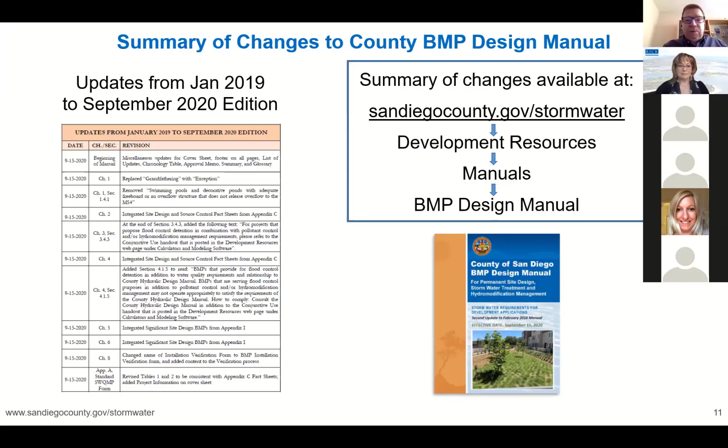So the updates are structured right now from the last update that we made in January 2019 all the way to September 2020, which is the current edition. Next. A little bit of context here for history. Originally from the 2013 municipal stormwater permit, all the co-permittees, which were all the incorporated cities in Region 9, which is 18 cities, plus the San Diego Regional Airport Authority and the Port of San Diego, including the County of San Diego for the unincorporated areas.

All of us gathered together and put together the model BMP Design Manual, which is the one on the far right. So also every jurisdiction put together its own BMP Design Manual to incorporate local specifics. In May 2018, the model BMP Design Manual was updated, and therefore most of the jurisdictions, not all of them, decided to update their own BMP Design Manual too, which the county did and released it in January 2019. So we went from a February 2016 all the way to January 2019 version, and we published a summary of changes. And then we go to the left, which is where we are right now.

We updated the County BMP Design Manual effective September 2020. And the summary of changes on the far left is what gives you the edits that were made from the January 2019 version all the way to the September 2020 version. Just for additional background, the model BMP Design Manual was updated and published in May of 2020, which is this year, just to incorporate some editorial edits. Even though I'm not showing the screen for the model BMP Design Manual, there was a minor update.

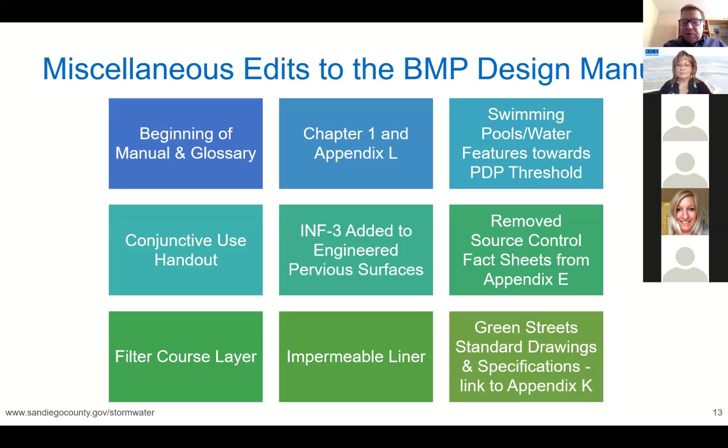Then we removed source control fact sheets from Appendix E, added filter course layer info, added impermeable liner info, and then made a connection of the Green Street standard drawings and specs into Appendix K. Next. So let's start at the beginning of the manual. So as you know, we have a new cover with a new photo, and we also changed the effective date, which is September 15th, 2020, which is this year.

Also, like I've shown before, we updated the summary of changes. We also updated the internal memo, which gives the green light to go ahead and publish the County BMP Design Manual. We also added a paragraph to the summary, which includes the chronology, which lists that this is the latest update to the BMP Design Manual. And then lastly, at the end of the manual, we updated the glossary to edit some terminology.

Next. All right, so we're in Chapter 1 and Appendix L. The only change is one global change, and it's replacing the term grandfathering with the term exception.

And, just to be more sensitive to today's times, if you Google grandfathering, you'll see there's some connotations in there. So we don't want to be part of that. So in our written guidance, we went ahead and updated that. It's just a minor update. It's just editorial, but just wanted everybody to know that that was done.

Next. In Chapter 1, in Section 141, we removed language which is shown struck through at the bottom, which is swimming pools and decorative ponds. The reason for that is this is one of the exclusions listed in the manual for areas that can be excluded from impervious area calculations towards determining if the project is a priority development project or PDP. So the one that remains is anything that's listed in Table 1-2, all of the areas that can be considered exempt from the stormwater requirements, such as routine maintenance, resurfacing, etc. So you don't count those as impervious surface.

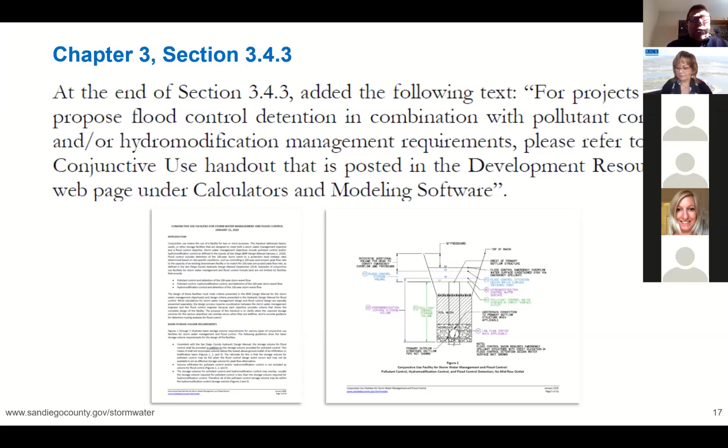Next. This is table B.1-1, which is the runoff factors. We do have permeable pavement listed under engineered pervious surfaces, but it's listed as a site design BMP permeable pavement, and we didn't have the structural BMP permeable pavement listed in there, so we just decided to add it. It doesn't change anything other than clarify that if you have that type of permeable pavement, it is also under that category of engineered pervious surfaces. Next.

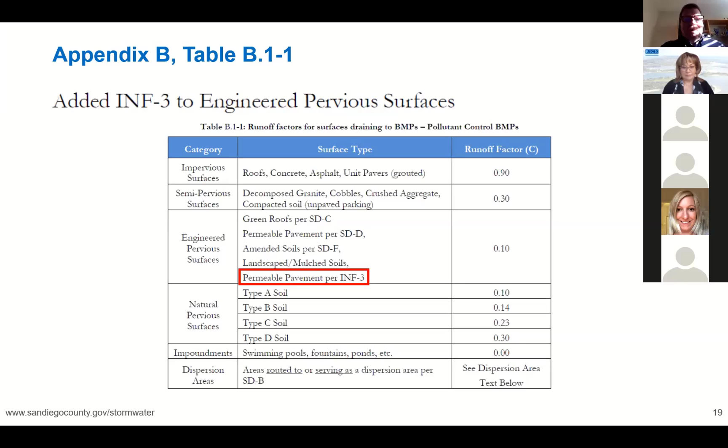We removed all the source control fact sheets from Appendix E, because that's the big change: now we have all the source control fact sheets in the new Appendix C. We updated the table. I'm going to talk about this table later in the presentation as to how it's currently labeled, but it's basically removing those types of source control BMPs from Appendix E.

Next. In Appendix E, we have three types of BMPs: BF-1, which is biofiltration, PR-1, which is biofiltration with partial retention, and INF-2, which is bioretention. We didn't have much information on the filter course, so we decided to add this language, which clarifies and gives you context: minimum 6 inches thick, provided in two separate 3-inch layers. Top layer shall be made of ASTM C33 choker sand, and the bottom layer shall be ASTM No. 8 aggregate. So just additional language to clarify.

Next. In Appendix E, this is the biofiltration BMP. We realized that we had the exact same figure for the three BMPs that I mentioned before, and when we have exactly the same figure, it ends up being confusing.

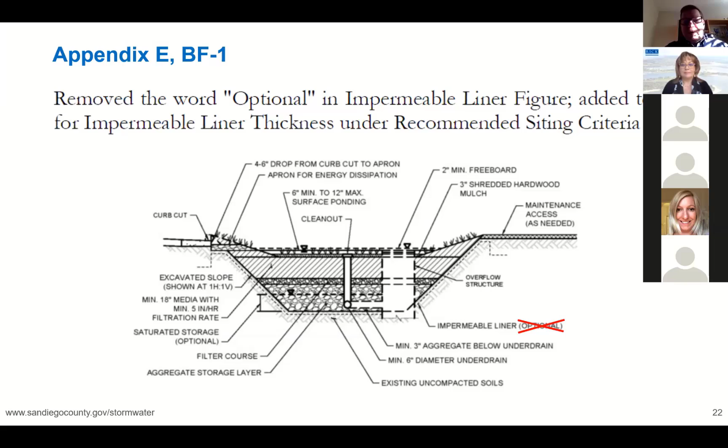So the biofiltration is supposed to have an impermeable liner, so it's not optional. We removed the word optional from that figure. That's the only change we made.

Next, Appendix E will also have the biofiltration BMP. There were some questions asked about the thickness of the impermeable liner. We already had that information, we just didn't make the link. It shall be 30 mil per County Design Standard Drawing GS 3.00 and County Green Street Supplement to Caltrans Specs 20-11.08B. So the information was already there since we published our Green Street Standard Drawings and Specs, or we made the update about a year ago.

30 mil is about the thickness of a credit card, just for reference. So again, we didn't have this, and now we have additional information on the thickness of the impermeable liner.

Next, we wanted to make a link to the county update to the design standard drawings for Green Streets, and also the specs, the specification for Caltrans and Green Book that refer to the Green Streets. So we just updated the information so you can find it easily. It's under the Development Resources website under Green Infrastructure Resources. Again, these were updated about a year ago, so that's the only connection we're making this time around.

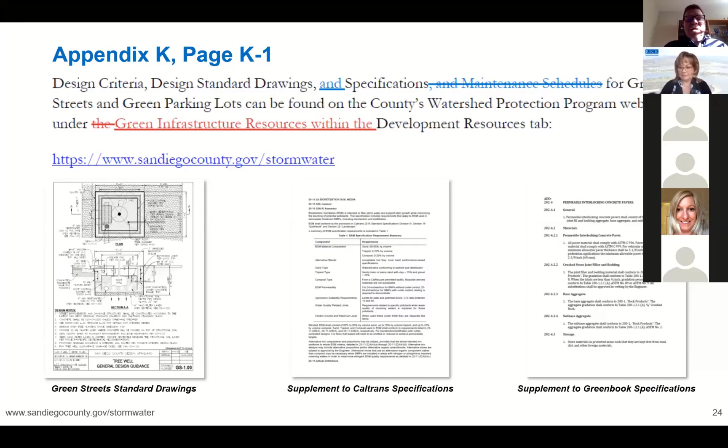Next, I'm going to pass it on to Jeremy Fanteroni to go over the site design and source control fact sheet, which is the new Appendix C. That's one of the changes that we made comprehensively in the manual this time around.

Okay, thanks Renee, and good morning everyone. Today I'm going to discuss the new site design and source control fact sheets in the new Appendix C. Next slide, please. So the overall goal of creating these fact sheets was to consolidate the site and source control information into an easily referenced location.

So when a customer is completing a PDP or a standard SWQMP form and wants more details about the source or site design BMP, they can find it in the fact sheets. In the past, we were having a hard time pointing people in the right direction when they're asking specific questions regarding, well, what's this site design, or what's this source control, and what does this actually mean to my project?

So I'll just go over some definitions just to make sure everyone's on the same page. What a baseline BMP is: a baseline BMP means any BMP that is required where applicable and feasible in all development projects. Baseline BMPs include both site and source control BMPs. Some baseline BMPs can be sized to qualify for DCV reductions on PDP projects. So a baseline BMP is basically applicable to all projects, and it's basically your site and source control BMPs. They're for PDP and standard projects.

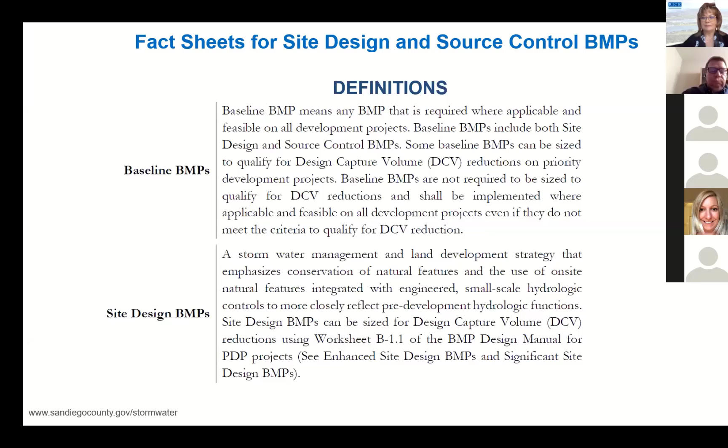Site design BMP is a stormwater management and land development strategy that emphasizes conservation of natural features and the use of on-site natural features integrated with engineered small-scale hydrologic controls to closely reflect pre-development hydrologic functions. So a site design BMP can be something as simple as dispersing to a permeable area, for example, or it can be a little more engineered with a tree well.

And a source control BMP is a land use or site planning practice or structure that aims to prevent runoff pollution by reducing the potential for contamination at the source of pollution. So source control BMPs minimize the contact between the pollutants and the stormwater runoff.

And then these fact sheets do not include enhanced site design BMPs or structural BMPs. Those have all been consolidated in Appendix E.

So here's the table of contents for the new fact sheets located in Appendix C. I'll just go through the columns. It provides the MS4 category, whether it's a site design or a source control BMP. It also gives the baseline BMP fact sheet name. We have BL1 through BL7. And the baseline BMP fact sheet kind of is the activity or feature that we're trying to mitigate.

And then within the fact sheets, there's BMP IDs. These are the actual BMPs that you'll show on the plans, the BMP ID that you show on your exhibits and plans that points to what BMP you're using to mitigate the potential pollutant generating feature.

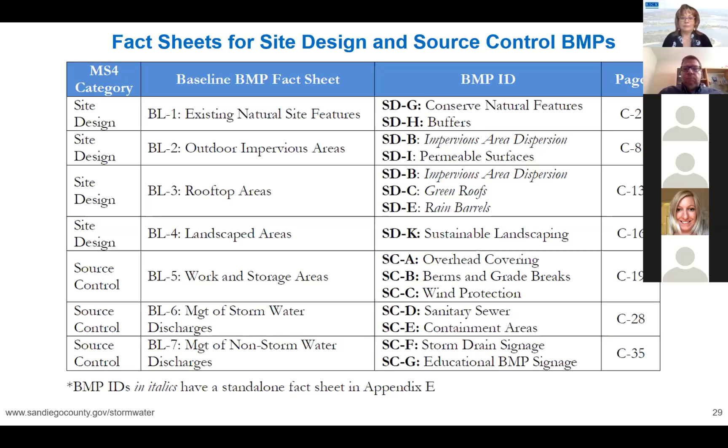If it's in italics, it means we already have a fact sheet, and we just reference it. Those fact sheets are in Appendix E, but we discuss how they can be relevant. They don't have to be designed for DCV reduction in all cases, and you can incorporate them into a standard project. And if we didn't have a BMP ID, they're located in the fact sheets. So here's just the format of the fact sheet.

The baseline BMP fact sheets are formatted to display all the relevant information. We did not necessarily create any significant amount of new content. We just consolidated content we already published in various documents. However, we did create some new content based on our experience.

Each fact sheet has this quick reference, as you see here. It gives you the MS4 category and the BMP ID that's within the fact sheet. And then we have the applicable site features header.

This section describes typical features like work areas, landscape areas, rooftops, where this fact sheet pertains to on your project. And then we have a SWQMP baseline BMP header, which describes which BMPs are applicable and how you document in the project SWQMP.

It gives you more details about the BMPs, especially if there's one in Appendix E, and how you can incorporate it into a standard project and how it's relevant. So the last slide depicts the fact sheet elements. Now here's if there's a BMP ID within the fact sheet.

So the first header is description. It provides an overall summary of what the BMP is and where it is commonly applicable. The next one is design considerations.

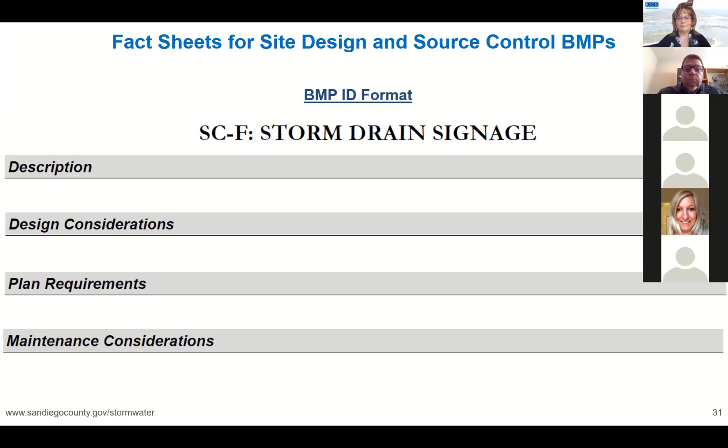So here's an example of a completed fact sheet putting all those elements together. As you see on the left, that's BL4, landscape areas. It has this little reference guide, and then talks about the applicable site features.

It has the SWQMP baseline BMP requirements, and it provides the example of the SWQMP table it's associated with. On the right, you can see it's SDK, that's the BMP ID, and we consolidated all the information pertaining to that BMP in this section, giving a description of what the BMP is, possible design considerations, and plan requirements.

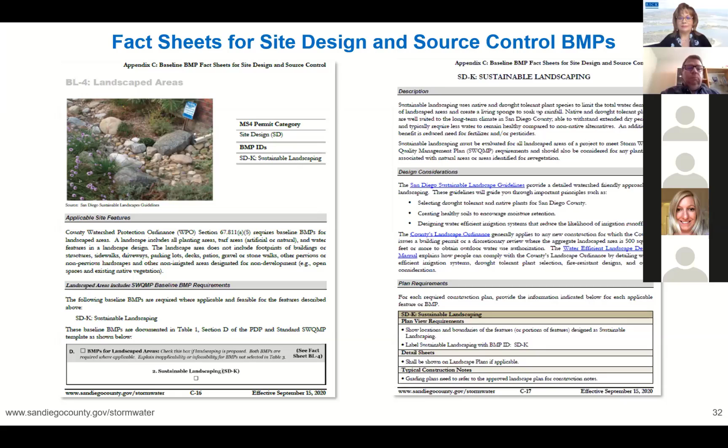Now I'm going to go through each one and highlight each of these, BL1 through BL7, describing what's in each. I can't go into too much detail, but I'll try to hit the highlights of each fact sheet. So this is BL1, existing natural site features.

It's a site design. The BMP IDs within this fact sheet are SDG, conserve natural features, and SDH, buffers. So the basic concepts of this fact sheet are to design projects around any important natural site features of the site where applicable and feasible.

So there's two BMPs. BMP SDG, conserve natural features, provides design considerations such as maintaining existing site drainage and hydrology, avoiding and/or restoring natural areas, and preventing construction phase impacts to soils. And SDH buffers describes where buffer zones may be feasible, setbacks, hydraulic disconnection, and other options to conserve natural areas on the site.

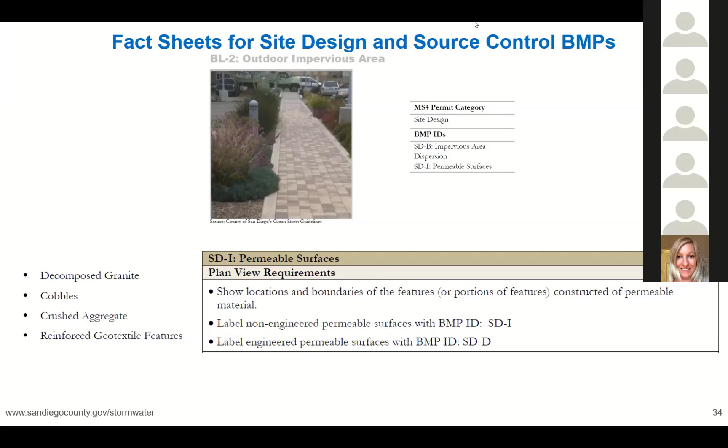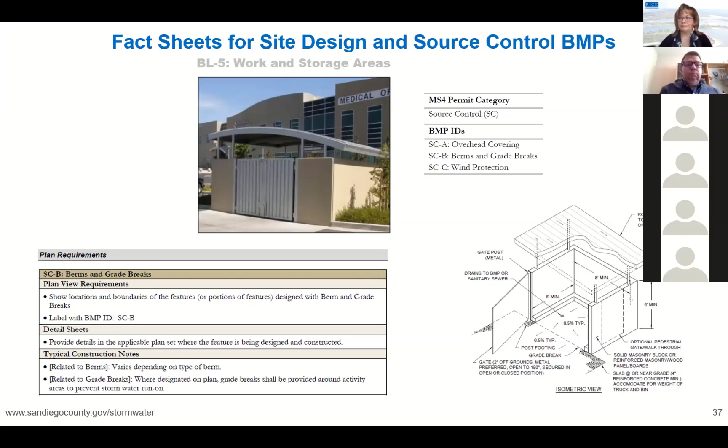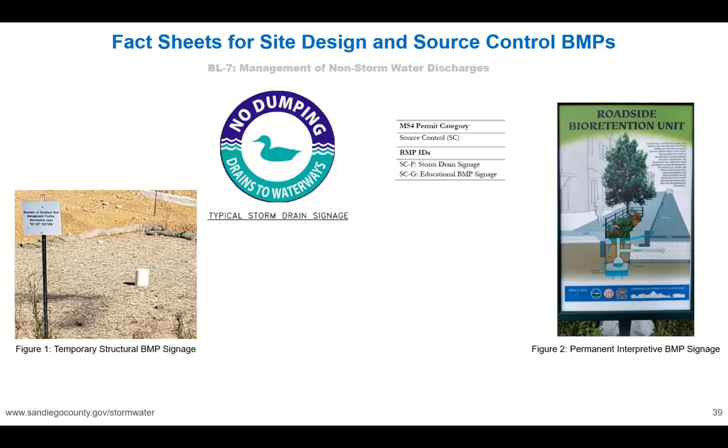This is BL7, the last baseline fact sheet - management of non-stormwater discharges. It's considered a source control BMP. The BMP IDs in this fact sheet are SCF, storm drain signage, and SCG, educational BMP signage. This fact sheet discusses the management of non-stormwater discharges from entering the storm drain system. The storm drain signage (SCF) is required at all stormwater conveyance system inlets and catch basins. Typical signage includes concrete stamping or concrete painting, placards, etc. SCG is actually a new one that we put in there - we decided to incorporate it because we've seen it being used as a type of BMP.

And so basically the fact sheet goes over 3 different types of educational signage. We were going to create a whole new fact sheet, but we decided to put it in this fact sheet just to try to streamline it and not make another BL8. But anyway, it's incorporated into this fact sheet, and it goes over 3 types of signage.

The first one is temporary BMP signage. You can see that photo on the left. It's basically a temporary sign that says, "Do not disturb this area," so hopefully contractors don't drive heavy equipment over a completed basin. This is a temporary measure that's removed once the project is stabilized.

The second educational signage is model home BMP signage. It provides education to future homeowners on the benefits and responsibilities of BMPs on the property. So if there's a model home and you have a proposed BMP on the model home, there should be some signage so folks understand why that BMP is there and understand their responsibility for maintaining it.

And then the last one is interpretive BMP signage. It provides a permanent educational BMP sign to the public on the benefits of the BMP. I've seen these used in the county, at my local Vons, of bioswales on that facility. When I went back east, I even saw it on Cape Cod. There was a BMP that was discharging into a bay and had a nice interpretive sign. So there are places where this type of signage may be appropriate for the public to understand why this BMP is there.

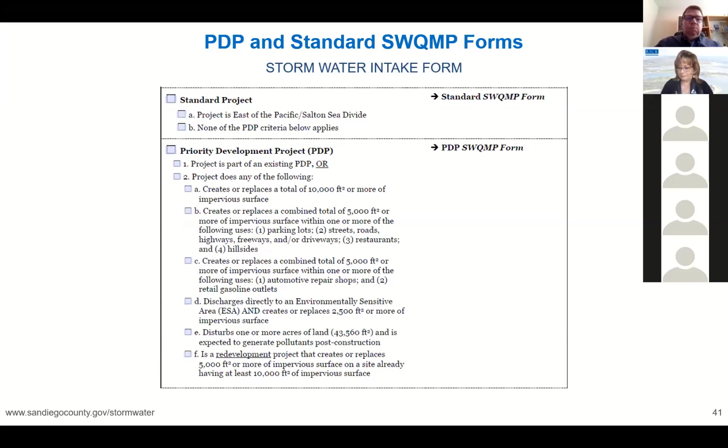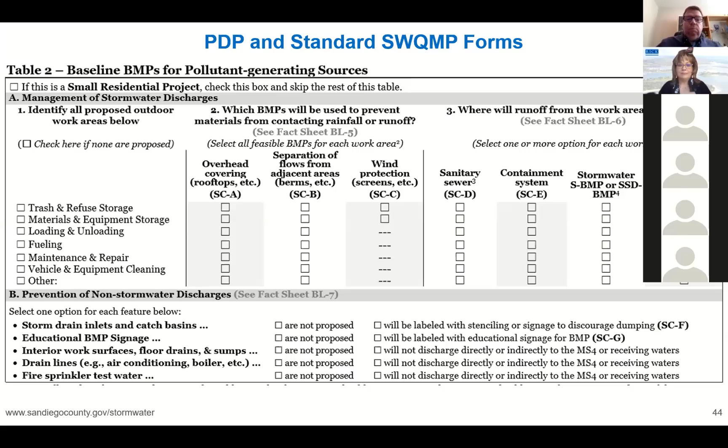So overall, these 2 tables have been streamlined, and now there's references for when people want to know a little bit more about these features.

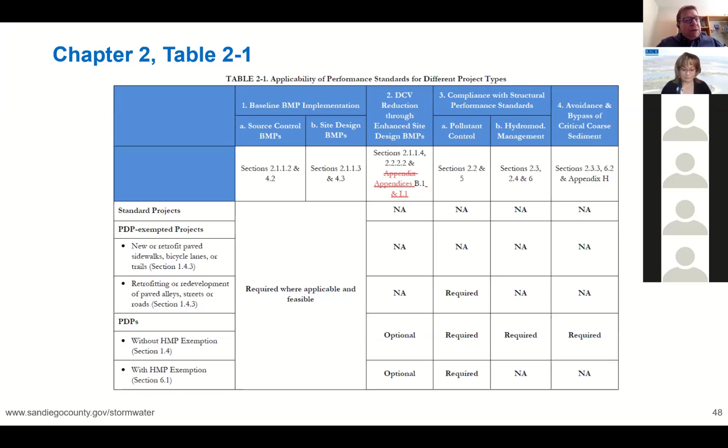One of the changes that we made was Table 2-1, which needed to include the new Appendix I. So we're doing this across the board, and anything that we can see, we're identifying. We're making the edit in this presentation, anything that has to do with adding a new appendix, or referring people to another location.

So here's another definition. This one is about an enhanced site design BMP. This was already in the 2019 BMP Design Manual. It says that enhanced site design BMPs are those BMPs that are sized for crediting towards reduction in design capture volume, or DCV, for a drainage management area, or DMA. These types of BMPs are credited in worksheet B1 of the BMP Design Manual to partially satisfy DCV reductions or HMP reductions in the DMA. So this is the concept that was already there in Appendix B.

The language was already in the 2019 BMP Design Manual, but now we're bringing it more to the front, so we can all see that this is an important category that we should not disregard, because DCV reduction actually matters, and it helps you when you're ultimately sizing if you're doing structural BMPs, or if you're going to go with this other route that we're going to be introducing pretty soon.

All right, so in Chapter 2, in Section 2.1.1.4, we introduced, again, a new worksheet.

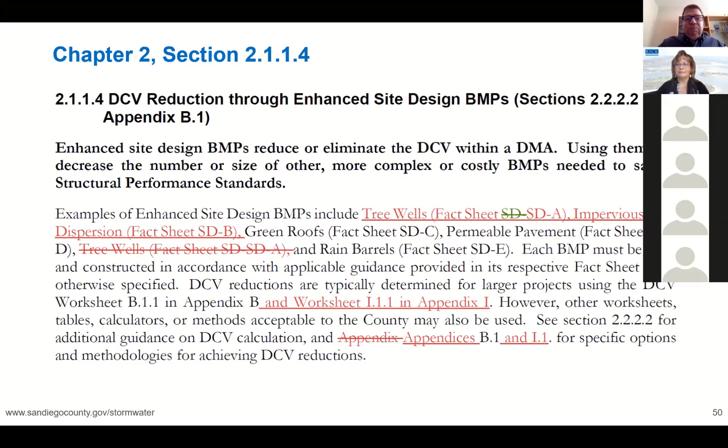In this case, in Appendix I, Worksheet I.1.1. This is an Appendix I, and we've got to make sure that when you're doing enhanced site design BMPs, you can use Appendix B1 or Appendix I1. So in a nutshell, we're just reorganizing the information, and the BMPs are now in order. The tree well is SDA, the impervious area dispersion is SDB, and then we go to the green roofs, permeable pavement, rain barrels, etc. So that's in a nutshell what this particular change is.

All right, so we go to Chapter 4, and there's Section 4.2, and we have Table 2 that Jeremy just went over. So I guess the important message here is that if you happen to have a small residential project, you don't have to fill out Table 2. Table 2 is really for the source control BMPs that are more like on the commercial sites, on the larger developments. So for small residential projects, this table doesn't really apply.

So what is a small residential project? A small residential project, what the county considers, is any project that requires either a building permit, minor residential grading permit, a site plan permit, or a tentative parcel map permit. So you can do all of those for a single family home, or the tentative parcel map permit for up to 4 single family homes and a remainder parcel. So really small residential projects.

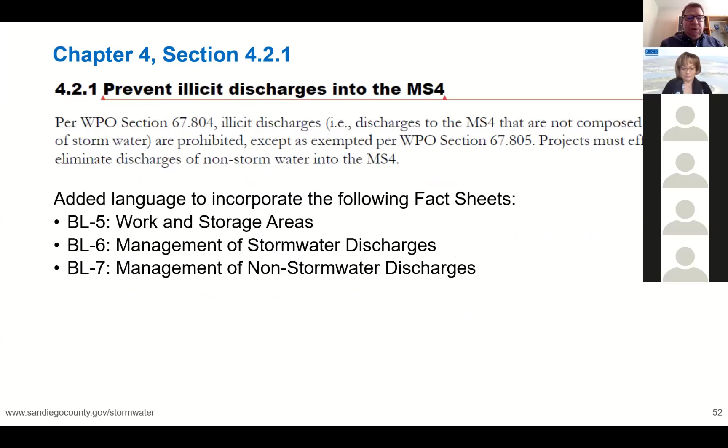All right, so again, we're keeping in Chapter 4, and this time Section 4.2.1, we needed to incorporate the new baseline BMP fact sheets, in this case for source control. So we just added language to incorporate the work and storage areas, the management of stormwater discharges, and the management of non-stormwater discharges.

In Section 4.2.2, we talk a lot about stenciling, and in the past we focused a lot on just the regular stencils for catch basins. So now we're not redefining it, but we're taking it an extra step, and now we also focus on adding the following type of BMP signage. We're calling it educational BMP signage, like Jeremy said, which includes temporary BMP signage, model home BMP signage, and interpretive BMP signage.

The temporary BMP signage is for when you constructed a BMP and you want to make sure that it doesn't get disturbed while you are still doing construction. That's where you place those. The model home BMP signage is more about if you happen to have a development with model homes, per the landscape ordinance, it is required to have some signage that will tell the prospective homeowner that they're going to have some landscape to maintain, and that landscaping may include some type of BMPs.

And the last one is the interpretive BMP signage, which is more on the permanent side of things as opposed to the previous two. This is more for educational purposes and just to tell people what those BMPs are supposed to do. And you would see those on large public works projects.

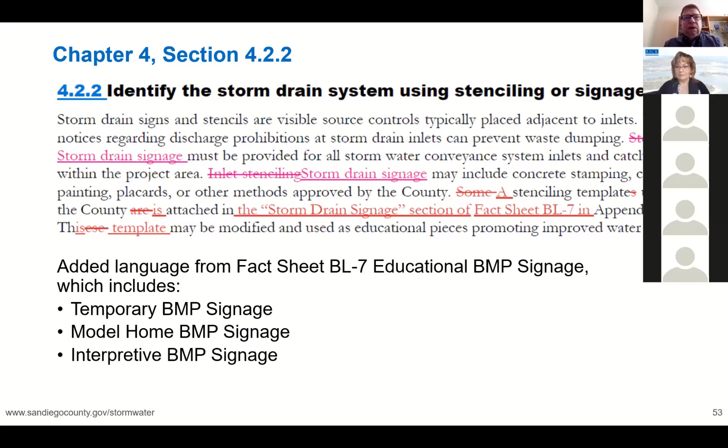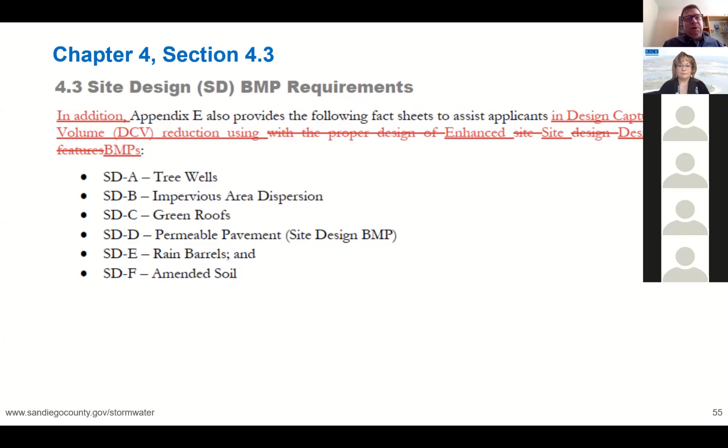So now, we're still in the same section, but we're adding the whole concept of enhanced site design BMPs, and what does it mean? Well, these are the types of BMPs that we consider enhanced site BMPs: the tree wells, the impervious area dispersion, the green roofs, the permeable pavement as a site design BMP, the rain barrels, and the amended soil. So these are all for you to get DCV reduction. That's really the goal.

All right, so on the same line, following the enhanced design BMPs, now we get into the significant site design BMPs, which I will go over the definition. So the SSD BMPs, or significant site design BMPs, are actually enhanced site BMPs which are fully able to result in quantifiable flow control benefits. So we're featuring those in Appendix I-1.

So not to confuse everything, but we talked about baseline BMPs, which are featured in Appendix C, which are the bare minimum, site design and source control. And now we get into Appendix E, which includes an update to the table.

So the update to the table includes how we're labeling them: which ones are the enhanced site design BMPs, which ones are the structural BMPs, and which ones are significant site design BMPs. So let's start with the enhanced site design BMPs. Those are on the very top, the ones that are for DCV reduction.

Structural BMPs are those that are intended to meet pollutant control and/or flow control. And you also have flow-through treatment control, which is something that is used for some types of projects, and also per the previous requirements of SWQMP.

And then lastly, we have an asterisk there on two types of enhanced site design BMPs, which are the tree wells and the impervious area dispersion. So those two can function as significant site design BMPs when sized according to section 5.2.3. And there's also plenty of language about this in the new Appendix I.

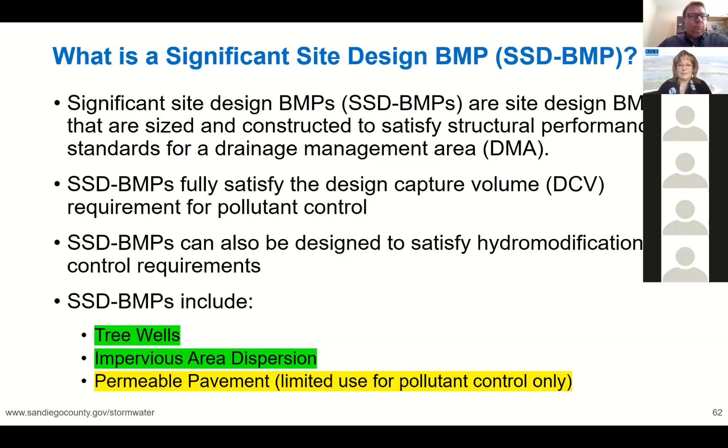So this means when you can meet these requirements, you would need no additional structural BMP downstream of these BMPs. They can take that PDP requirement for structural BMPs as a site design BMP. So I'm going to try to clarify the categories of site design BMPs in a couple different ways, since I know we're starting to use this name in many different ways. And it's because we now have a couple of different implementation levels for the site design BMPs.

Under our MS4 permit and under Chapter 4 of the BMP Design Manual, certain site design practices are always required to be considered for a site, and it includes some practices like impervious area dispersion. And we need to implement them as much as feasible, and we don't really have a minimum size that we have to meet in order to implement them. So if we have a small size or a limited area, that doesn't rule out or preclude their use. As a baseline implementation, we need to consider it and apply it wherever it's applicable and feasible.

The site design practices do have some design recommendations, and when we can meet the certain minimum sizing and design requirements, implementation of some of these site design BMPs can reduce the overall design capture volume that has to be managed for pollutant control. This is what the county calls enhanced site design BMP. If you meet the minimum sizing and design requirements, it can reduce the total design capture volume that's draining to a structural BMP.

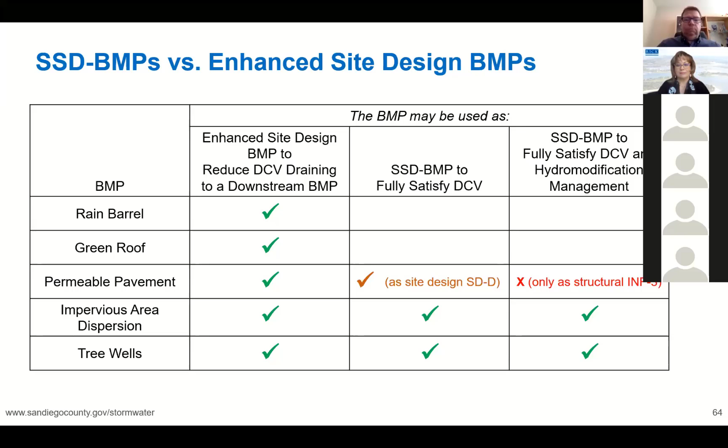So some of you who have been practicing for several years and have already implemented some of these practices might be wondering exactly what's new about this. So I want to clarify a timeline of the standards and also try to be clear about what is unique to the county versus what is coming from the Model BMP Design Manual and is applicable in other jurisdictions. So we'll start with 2016.

The 2016 Model BMP Design Manual for all of the co-permittees provided criteria for site design BMPs to reduce design capture volume. And the County of San Diego adopted the design options from the Model BMP Design Manual, and also removed the upper limit of how much design capture volume could be managed by a tree well. I believe the model had a limit of 25% of the DCV being satisfied by a tree well, but the county had removed that limit and allowed for a greater amount of the design capture volume to be satisfied by a tree well.

At that time in 2016, nobody had any sizing criteria available for the site design BMPs to satisfy hydromodification management.

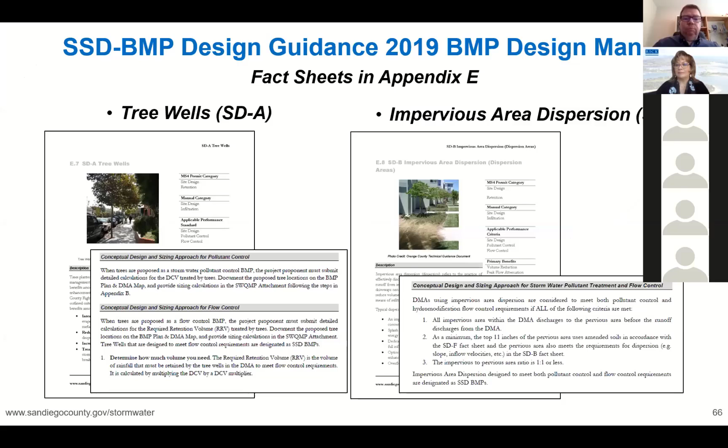Under the county's 2019 BMP Design Manual, the guidance to design SSD BMPs was presented in the fact sheets for the BMPs in Appendix E. Now in the 2020 manual, we're still going to use the fact sheets from Appendix E, but we also have step-by-step guidance in Appendix I, and we have the new spreadsheet tool. I'll continue discussing the contents of Appendix I, and then later in this presentation, Renee will present the spreadsheet tool, and Renee and I will run through an example problem.

Okay, what is impervious area dispersion? I think a lot of our audience is very familiar with this, but we have a diverse audience today, so I'll go over this. Impervious area dispersion refers to the practice of dispersing runoff from impervious area across a pervious area before collecting it into a storm drain system. It's a really good way to manage runoff from rooftops, patios, parking lots, walkways, or any other area where runoff can drain off the edge of the impervious area as sheet flow.

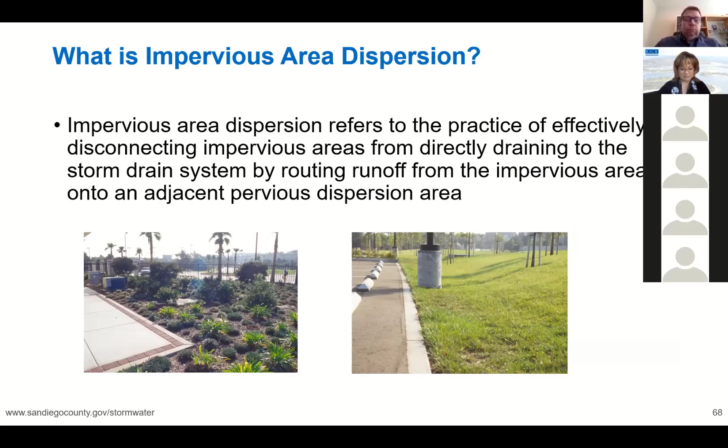The dispersion area refers to the dedicated pervious area that receives the runoff from the impervious area. In the dispersion area, we have soil capable of infiltrating some of the runoff, and vegetation that slows the runoff, giving it time to get into the soils and be infiltrated. The design elements we consider for dispersion areas, which define their performance as an SSD-BMP, are the ratio of impervious area draining to pervious dispersion area, the surface soil type in the dispersion area, the length that runoff travels across the dispersion area as sheet flow, and the slope of the dispersion area.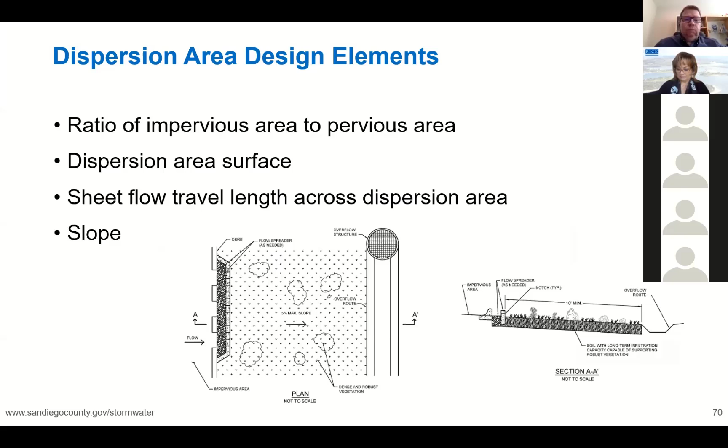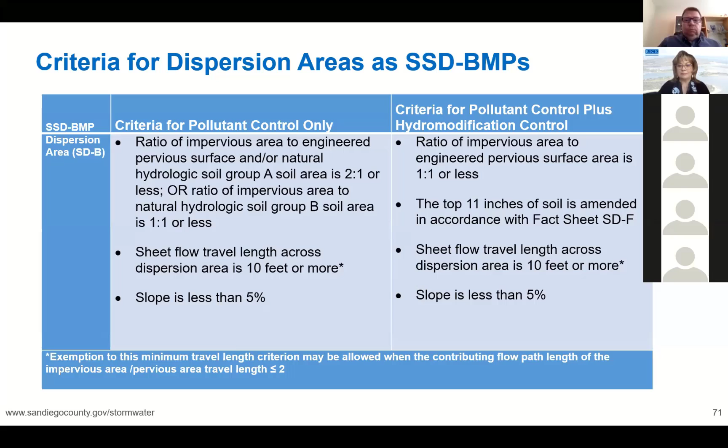This table is provided in Appendix I, and it summarizes the criteria for impervious area dispersion as an SSD-BMP, in terms of what's required for handling pollutant control only versus pollutant control plus hydromodification control. On the lower half of the table, you can see the criteria for travel length and slope are the same. The difference between using this for pollutant control only versus pollutant control plus hydromodification control is the maximum allowable ratio of impervious area draining onto pervious area, and the type of dispersion area surface that's allowed. For hydromodification control, the surface must be an engineered pervious surface, with at least the top 11 inches of soil using amended soil based on fact sheet SDF.

This is a summary of different types of pervious surfaces typically considered for dispersion areas. You can disperse runoff across natural or native soil without applying any soil amendment, but for that case, only hydrologic soil group A or B can be used as an SSD-BMP, and only for pollutant control. Hydrologic soil groups A and B naturally infiltrate better. Groups C and D will infiltrate some, so they can get you credit as an enhanced site design BMP towards reducing design capture volume to a downstream structural BMP, but they can't get you full credit as an SSD BMP.

Now, if you amend the soil in accordance with the county's fact sheet SDF, no matter what the underlying native soil is, once you amend it, it becomes engineered pervious surface. So you can look at the runoff factor for engineered pervious surface and classify it as that, and in that case it can be used as an SSD BMP for pollutant control. If you ensure the thickness you've amended is at least 11 inches thick, then you can use it for pollutant control and hydromodification control. The reason for the 11-inch requirement is based on the continuous simulation modeling backup prepared to develop the criteria for using a dispersion area to meet hydromodification control requirements.

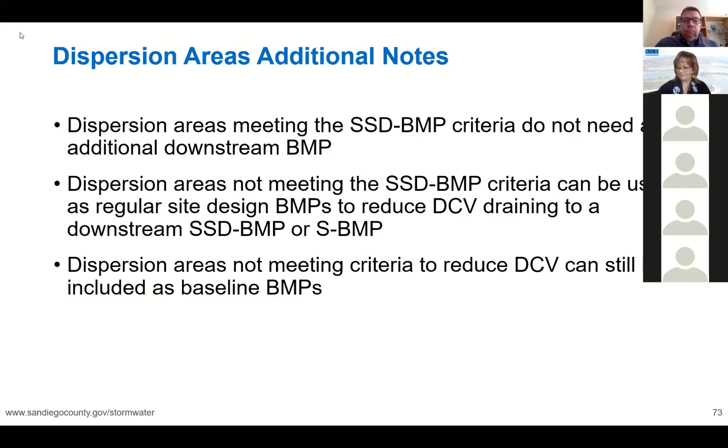A tree well is a stormwater management feature that includes a tree, planted in a minimum designed volume of soil media. This configuration allows for storage, infiltration, and evapotranspiration of runoff.

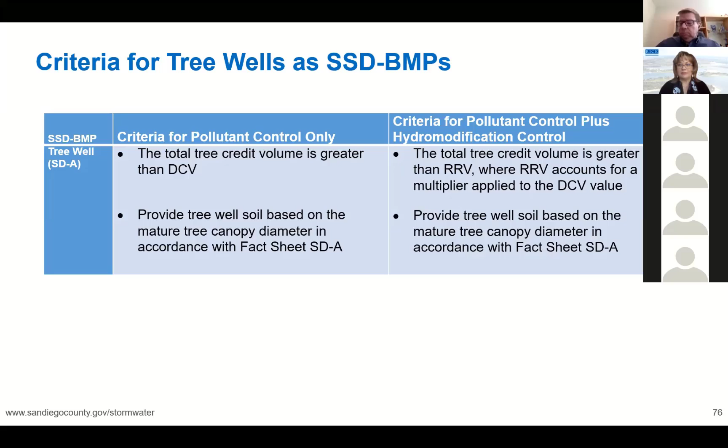On the bottom of the table, you can see that the design for the soil volume is going to be the same. So the key difference shown at the top of the table is how much tree credit volume you're going to need. You'll need trees with a larger tree credit volume, or use more tree wells, in order to satisfy hydromodification requirements.

I think of the tree well design process as a cycle, because it's going to include coordination back and forth between the civil engineer and the project landscape architect to agree on the trees to be used and to agree on the layout. My next slides are going to walk through the steps on this slide.

These steps are: initial tree selection, getting the design capture volume, and then, if necessary, getting the required retention volume, confirming the number of trees, and then getting the dimensions and the spacing of the tree wells.

The process should start with discussing the tree options with the project landscape architect. We always want to make sure that the stormwater engineer doesn't submit a design that's inconsistent with the landscape plan for the site.

To get this discussion started with the landscape architect, there's a tree palette table provided in fact sheet SDA, and also copied into Appendix I, that lists the tree species and sizes for the tree wells as SSD-BMPs. You can use other tree species not listed on this table at the discretion of the county landscape architect.

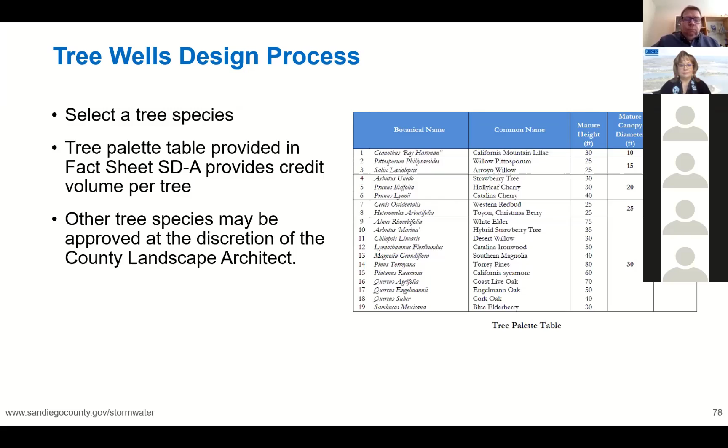So once we've cleared with the landscape architect that we're intending to use tree wells to manage the stormwater, we need to determine the amount of stormwater that needs to be managed.

For each drainage management area that's using tree wells, we calculate the design capture volume for pollutant control, just the same as if we were designing a structural BMP such as biofiltration.

Now, if hydromodification management is required, we're going to increase the design capture volume by a factor we call the DCV multiplier, and the result is called the required retention volume, or RRV. The RRV is the total tree credit volume that it would take to satisfy both pollutant control and hydromodification control together.

To be clear, the DCV for the pollutant control is encompassed within the RRV, so we don't have to add them together. We would just need to get the RRV, and that's the total amount of the tree credit volume needed.

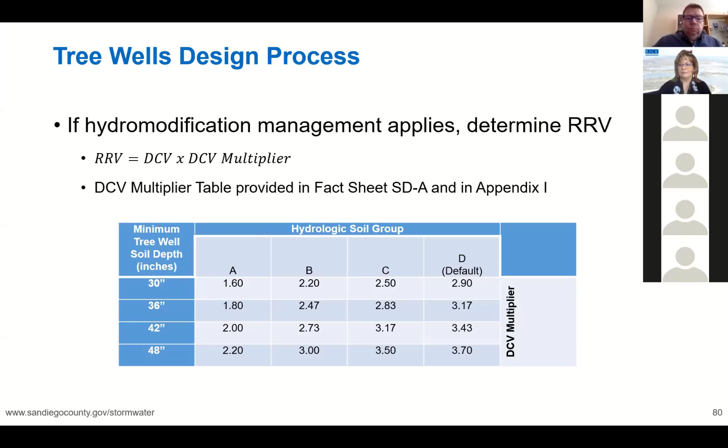The DCV multiplier table is based on the continuous simulation hydrologic modeling that the county prepared in order to come up with the design criteria. The table is provided in both fact sheet SDA and Appendix I.

So here are some notes about using the DCV multiplier table. You'll need to know the underlying native hydrologic soil group A, B, C, or D from the pre-project condition. Then you want to select the DCV multiplier from the standard tree well depths presented on the left-hand side of the table: 30, 36, 42, or 48 inches.

The minimum depth is 30 inches, and this is because the tree well soil has to be installed to at least 30 inches depth according to fact sheet SDA.

There's no requirement to interpolate multipliers between the standard depths. If your actual depth is not shown, you can use the multiplier for the next lower depth, as long as the depth you're installing is at least 30 inches, because the soil has to be at least 30 inches thick.

After you have the DCV or the RRV, depending on which one you needed—DCV for pollutant control only, or RRV for pollutant control plus hydromodification control—your next step is to determine how many trees you need to satisfy the volume. Each tree species has a given credit volume shown in the right-hand column of the tree palette table. The number of trees you need is your DCV or RRV divided by the given credit volume for the tree that you and the landscape architect agreed on when you started this process.

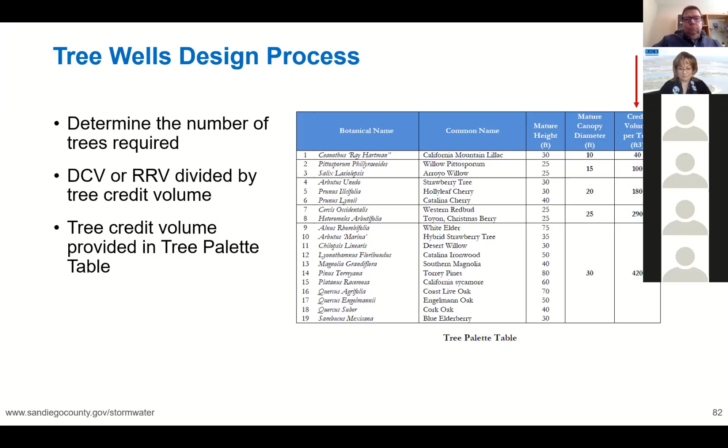If you need to at this point, you might want to revisit the landscape architect and make decisions about whether to use multiple 10-foot canopy trees versus one 20-foot canopy tree.

Now, once we finalize the tree selection and the number of trees, the next step is to design the tree well soil volume. At this point, the tree well soil volume is not based on the DCV or the RRV—it's actually just based on the size of the tree. So based on fact sheet SDA, the tree well has to have a minimum of 2 cubic feet of soil volume per square foot of mature tree canopy projection area.

We get the tree canopy projection area based on the tree's mature canopy diameter, which is presented in the tree palette table. Then we multiply that by 2 for the 2 cubic feet of soil required per square foot of canopy area, and then we know the minimum volume of soil that we need to have in the tree well. Knowing the minimum volume of soil needed and the depth we intend to install it, we can divide the volume by the depth to get the area of the tree well soil installation.

You can configure this in many different ways. It could be in a circular pit, or it could be in a square or a rectangular excavation. There are some factors to consider.

The tree well soil needs to be installed within 1.5 times the mature tree canopy radius, so we don't want that tree well soil extending too far away from the tree—it needs to be close to the tree. This will be important if you're trying to have a rectangular tree well extending parallel to a street, like in a parkway. You'll need to make sure not to tighten up the width so much that the length extends outside of 1.5 times the tree canopy radius.

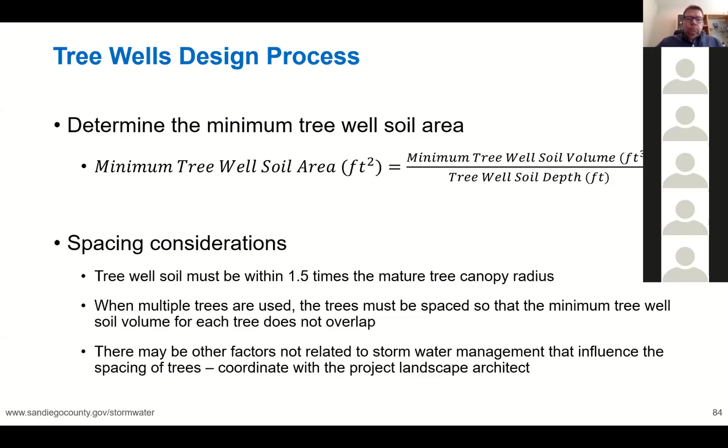And of course, trees should always be considered for a project because the benefits of trees are much broader than just stormwater management. That concludes our discussion of tree wells.

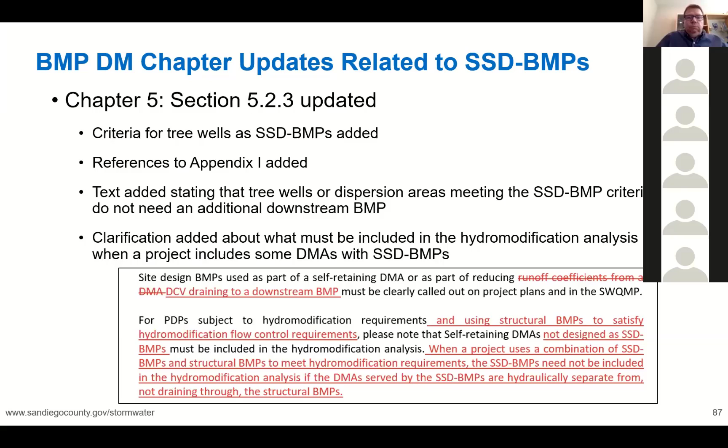In Chapter 5 of the BMP Design Manual, we've had edits to add the SSD criteria, to add references to Appendix I, and to clarify that SSD BMPs meet PDP requirements and do not need structural BMPs downstream. And also we have a little discussion of what to do for hydromodification analysis if the project is using some SSD BMPs.

Chapter 6 has been updated to allow SSD BMPs as an option for satisfying hydromodification control requirements. The new text on page 611 clarifies that if you design SSD BMPs according to their design criteria, you will not need to have a continuous simulation analysis. Finally, appendices B and G have had text added indicating that SSD BMPs can be used to satisfy the requirements for pollutant control and hydromod control.

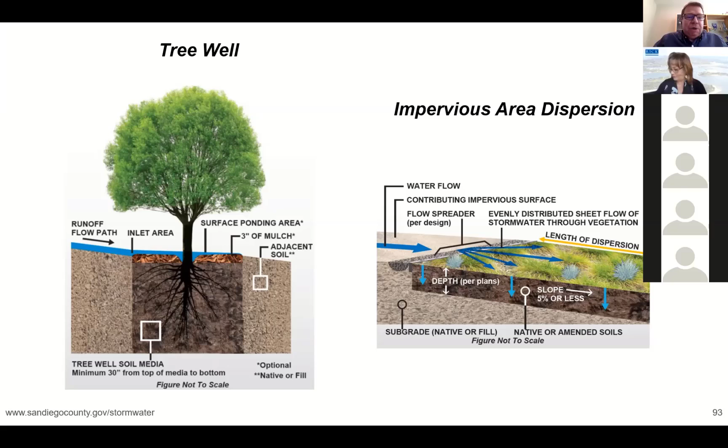Next. So we're using these two figures, the tree well figure and the impervious dispersion figure. You're going to see these two figures across the board in a number of different slides moving forward. They give you the parameters you have to take into account when you're designing one of these types of SSD BMPs. So again, tree well and impervious area dispersion is what we're going to be talking about moving forward.

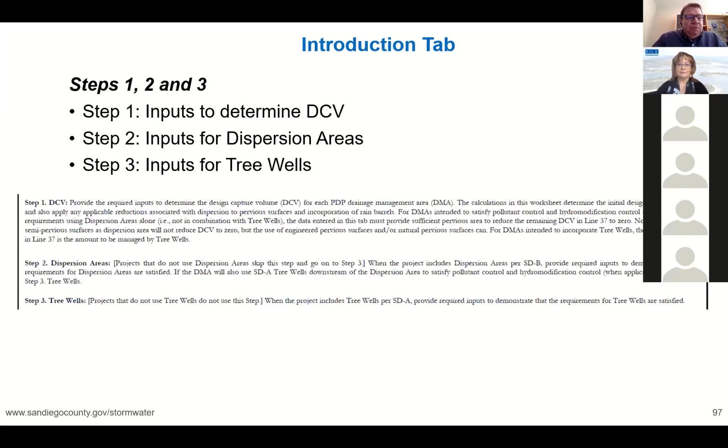And some people may decide, no, I don't want to use dispersion areas as an SSD BMP. So you just go directly into step 3, and then you do the rest of your inputs there to make sure that you are fully compliant with both pollutant control and flow control.

All right, and at the end of the tab, there's a disclaimer, similar to all of the other tools that the county has produced, and you use this sort of at your own risk. So this tool is made to comply with PDP requirements, and in order to meet MS4 permit requirements for priority development projects, et cetera. Make sure that you always use the most current version of the tool. We're currently in version 1.0.

And lastly, direct any questions, if it's a private development project, to your PDS project manager, Planning and Development Services. Or there's also a BMP program email that is just a generic email address, and the question will be routed to the right county staff to answer the question. So again, there's pathways here to direct questions to.

All right, so this is at a glance what the Design Capture Volume or DCV tab looks like. Like I said before, it has 10 different columns, and the light green cells are the ones where you're going to do your inputs. In this case, your first column on the left shows less. It doesn't show any gray cells. That's because some of the inputs there predetermined that you're going to have additional information to input, and that's where those cells will go from gray to light green. And then you're going to have your last cells, which are going to be your outputs. So you can see it a little bit more if you focus on only one column.

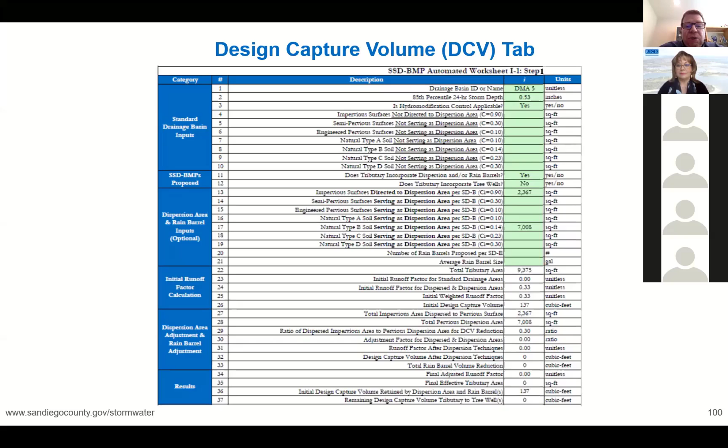So the spreadsheet is intended and designed to have different inputs. The first are standard drainage basin inputs. Then you go into SSD BMPs that are being proposed, like your dispersion areas, rain barrels, or tree wells. Then your inputs on the dispersion areas and rain barrel inputs, which could be optional. Then your initial runoff factor calculations, and those will be automatically populated based on your input. Your dispersion area adjustment and rain barrel adjustments, again, those will be automatically populated because they're white cells. And then lastly, your last 4 rows will be your results. And we're going to be going over an example later in the presentation.

All right, then we go into the dispersion areas tab, and this is what it looks like at a glance. Again, we keep using the same figure, so when you open up the spreadsheet, you'll see the figure, so you can always refer to it, and then you'll see the rest of the cells. In this case, you start seeing either dark green, depending on how you look at the colors, or fluorescent green, as I like to call it. And that particular shade of green tells you that some of those cells have already been pre-populated based on your inputs on your previous tab. Next.

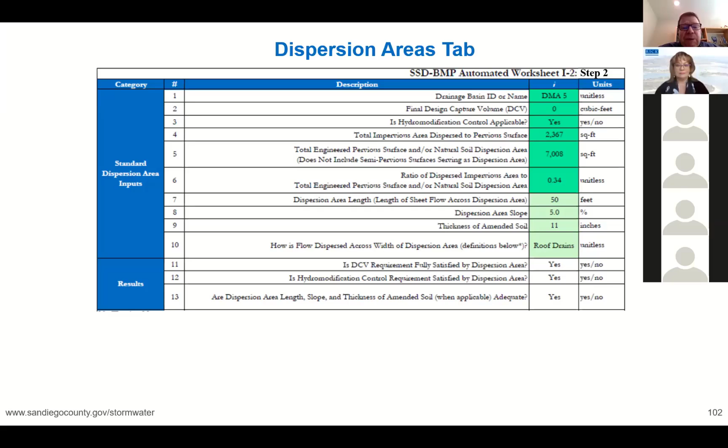All right, so in this case, those were previously populated. Some are standard dispersion area inputs, and there's going to be some light green cells in there where you need to input additional information in order to complete the example. Now, if any of the additional information that you enter in the light green cells does not compute, or you start getting orange cells at the bottom, that means there are some things that you need to consider in your design, and you need to change some of the inputs so you have no more orange messages in your results, which are your last three rows: is your DCV requirement fully satisfied by the dispersion area, is hydromodification control requirement satisfied by the dispersion areas, and are the dispersion area length, slope, and thickness of amended soil adequate. All right, we'll go to the next slide, please.

And lastly, within the dispersion areas tab, we have a note at the very bottom of the spreadsheet that tells you some of the ways you can disperse flow within the dispersion area. The different ways are sheet flow, a spreader, roof drains, curb cuts, or other. And if you choose other, then you would document that in the PDP SWQMP.

Again, you have some dark green cells at the very top. Those are going to be pre-populated based on your DCV inputs in your first tab. Then you're going to have your light green cells, which is what you're going to input. And then your white cells are going to be auto-populated and giving you the results.

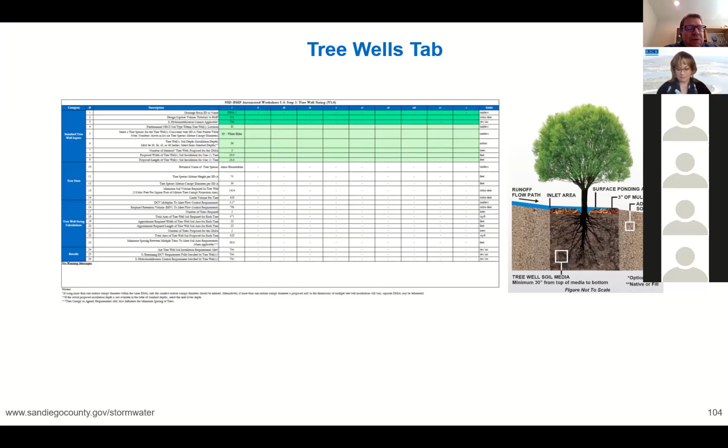So if we focus on only one column this time around, you have your pre-populated dark green cells, which are the standard tree well inputs. And then some of those will be light green, which we need to include. Some of them will be soil type. Some of them will be the type of tree. In this case, it'll be a pull-down menu. Most of these will be pull-downs. The pull-down menu for the trees will not only give you the mature canopy diameter, but it will also give you the common name of the tree species, so they go hand in hand.

And then you also need to input other parameters, such as your soil depth, your number of tree wells that are proposed within that DMA, your soil installation, and one side by the other side, assuming it's a cube. So those were the standard tree well inputs. Then you're going to get your tree data below. One of them is that you automatically get populated the botanical name of the tree species, because the landscape plans typically require to have both names in there.

And then you're going to have some other outputs like tree well sizing calculator outputs, and then lastly the 3 lines, which are the most important ones. You want to make sure that you don't get any orange color cells in there, that you just get plain white. So the 3 questions are: are your tree well soil installation requirements met? Is the remaining DCV requirement fully satisfied by the tree wells? And is the hydromodification control requirement fully satisfied by the tree wells? So if the answer is yes to the 3, then you're pretty much done with that drainage management area.

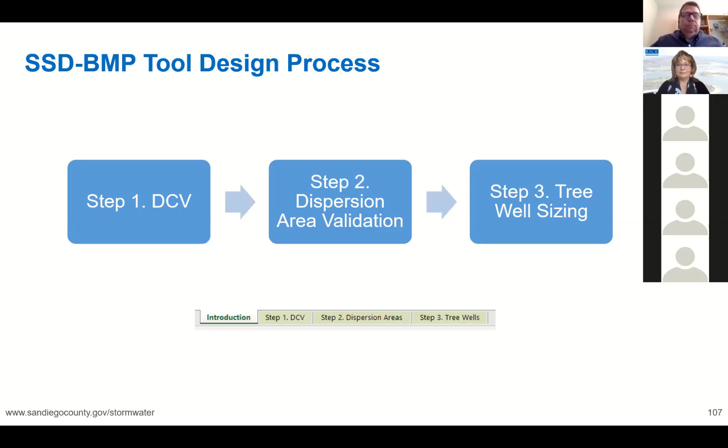Okay, so as Renee discussed, the spreadsheet is set up as steps 1, 2 and 3, and it's intended to be a pretty similar format to the pollutant control spreadsheet. However, you will see in this example that you don't always need to use all 3 steps. We're going to use steps 1 and 2 for dispersion, and then steps 1 and 3 for the tree well example. It is possible to have a dispersion area upstream of a tree well, and in that case you'd use all 3 steps. But to keep it simple, we're not going to combine the BMPs. We'll just do 2 separate drainage management areas and design 1 BMP for each of them.

Okay, let's start the dispersion area. This is the data for our example. We're going to assume that hydromodification control is required for this project. And let's assume that we've looked up the 85th percentile rainfall for this project, and it's been determined to be 0.52 inches. On our drainage management area plan, in this DMA, we have 1,840 square feet of impervious surface that's directed to pervious area. The impervious is the total of the 1,560 plus the 280. And then we have a total of 3,360 square feet of engineered pervious surface that serves as dispersion area.

Now, all of the impervious area travels across at least 36 feet of the pervious area, so we'll use 36 feet for our length. Let's assume that the slope of this lawn area is 2%, and that we will amend the soil 12 inches thick for this example. And the flow is going to be dispersed across the width of the dispersion area through sheet flow. It comes off the entire width of the walkway. If the building roof has roof drains, it may have a couple of points of discharge, but as the flow crosses over the walkway area, it will become dispersed across the width of the pervious area.

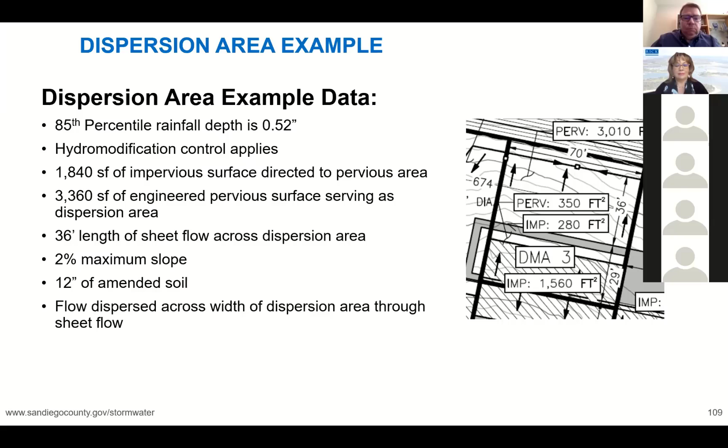So all of the impervious area manages to get across at least 36 feet of the pervious area before it gets collected into the storm drain system.

We're going to start on the DCV tab titled Step 1 DCV, and the first thing we do is enter the drainage basin ID number, then the 85th percentile rainfall, and the hydromodification control applicability in rows 1 to 3. The next thing we want to enter is the data for the surfaces in the DMA.

Since we're going to be designing dispersion, we'll need to use rows 13 and below for the surfaces—where the labels talk about it being directed to a dispersion area or serving as a dispersion area. Initially when you open the spreadsheet, these are grayed out by default and don't take data. But as soon as we select yes in row 11 for whether the tributary area incorporates dispersion and/or rain barrels, that yes will activate rows 13 to 21, causing them to turn light green so you can enter data.

It's very similar to the pollutant control spreadsheet for Appendix B—we have the same function in that spreadsheet, so just think of it as similar. As long as you've toggled on row 11, you'll have access to the surfaces for the dispersion area.

So we enter the total impervious area draining to pervious area in row 13. That's the 1,840 square feet.

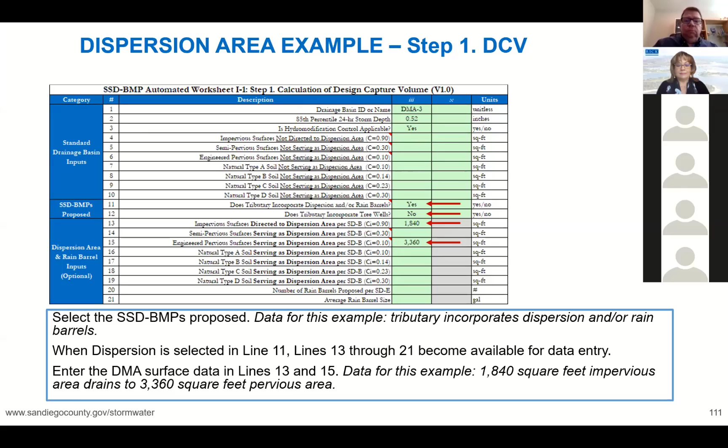So the project will be using 12-inch thick amended soil. We'll enter that in row 15 for engineered pervious surfaces serving as dispersion area—that's our 3,360 square feet.

After we've entered the surface data, the white cells in rows 22 to 37 will be automatically calculated. For a dispersion area to be used as an SSD BMP, we're looking for the DCV in the last row, row 37, to go down to 0.

This will happen if we've provided enough pervious area so that the maximum impervious to pervious ratio is not exceeded. So what's going to happen in the calculations is the spreadsheet will determine the ratio of impervious area to pervious area, then do the DCV reduction factors, and calculate the reduced DCV.

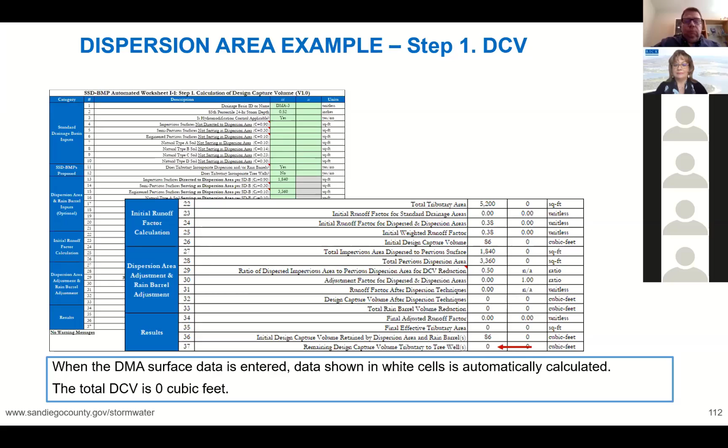And for dispersion to be used as an SSD BMP, we need to reduce it all the way down to 0 in line 37. That completes step 1, DCV.

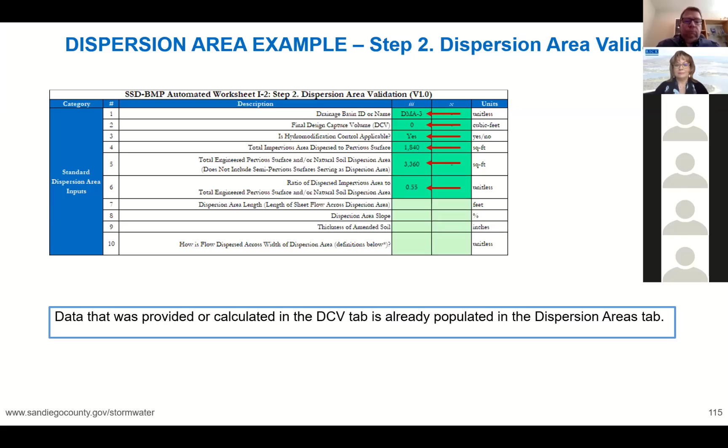In row 6, the ratio of the dispersed impervious area to pervious area is showing as 0.55. That is well within the maximum allowable ratio of 1 to 1 in order to use this BMP for hydromodification control. So now we need to enter the details about the dispersion area to confirm that it meets the criteria for flow travel length, slope, and thickness of amended soil.

So we're going to enter the data that matches the plan. We had 36 feet of travel length, a 2% slope, and the project will be having 12 inches thickness of amended soil. We'll go ahead and enter those in rows 7, 8, and 9.

In row 10, we can also indicate how the flow is dispersed across the total width of the pervious area. This is something to help your plan reviewer know what to be looking for on your grading plan.

So we'll go ahead and select sheet flow in row 10. When you see the full size of this sheet, down at the bottom, there are footnotes that explain what the different types of manners of dispersing the sheet flow are, because there's a drop-down list in row 10 that we used to select sheet flow.

After the data has been entered in lines 7, 8, and 9, the results in lines 11, 12, and 13 are going to be updated. If for some reason something didn't meet the required criteria, for example if the travel length was too short or if the slope was too steep, there would be a warning message in the box at the bottom. You'd see orange in the cell that has a problem, and then under warning messages, it'll give you a reference for what line number has a problem and some suggestions for what you need to do to correct it.

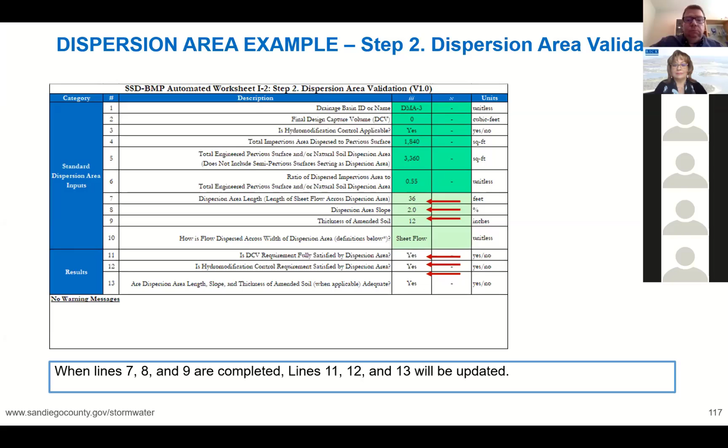Now in this case, for the example problem, the design that's entered meets the criteria. So lines 11, 12, and 13 say yes, and there are no warning messages, so this DMA is complete.

Just to close out this example, a reminder of what we need to have on the DMA exhibit in order to be able to review and verify the design. We'll need to see the direction of the flow, showing that the impervious area is intended to drain across the pervious area. We'll need enough information about the total square footage of each type of area to be able to verify the ratio, and we'll need to be able to verify the travel length. The plans should also have notes indicating the type of pervious surface to be used.

Now let's start the tree well example. This is the data for our example. Again, it's still in the same project site, so we have the 85th percentile rainfall we determined was 0.52 inches, and hydromodification control is applicable for this site. For the tree well, we do need to know the hydrologic soil group of the native soil, and so for this example we're going to assume it was type C.

Now looking at this DMA, you can see we might actually have enough pervious area that we could get some credit for reducing DCV through dispersion, but just for the purpose of this example, to keep it simple and only do one BMP, I'm not going to quantify that. You probably could, but again just to keep it simple, I'm not going to for this example.

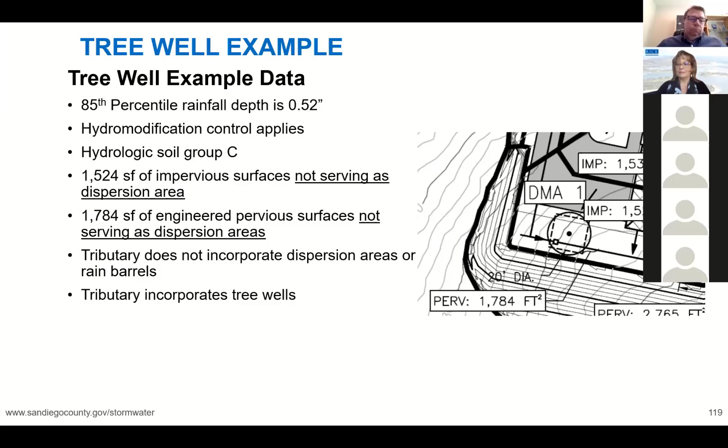So we're going to say that we have 1,524 square feet of impervious surfaces not serving as dispersion area, and the pervious surface is 1,784 square feet. This tributary does not incorporate dispersion or rain barrels. It is using a tree well.

So we'll start on the DCV tab, where we enter the DMA ID, the 85th percentile rainfall, and the hydromodification control applicability in rows 1 through 3. Next thing we're going to do is enter the DMA surface data and the SSD BMPs proposed.

Since we're not quantifying dispersion in this example, we're going to enter the surface data in rows 4 through 10, where the surfaces are not directed to or serving as a dispersion area. So we have our 1,524 square feet of impervious surfaces in row 4 and 1,784 square feet of pervious surface in row 6. And then we toggle on row 12 for incorporating tree wells.

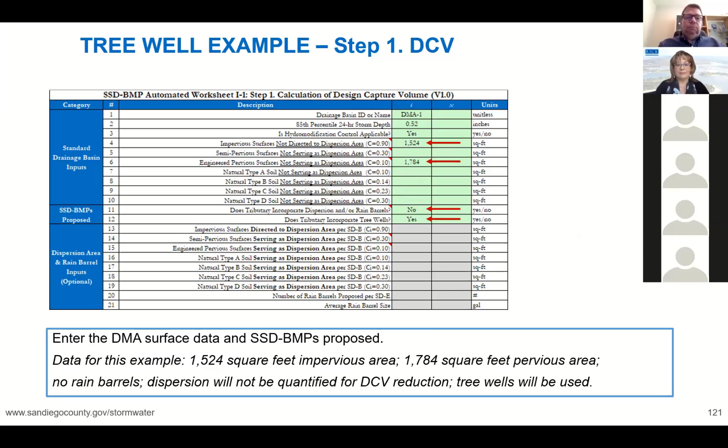So after we've entered the surface data, all the white cells in rows 22 to 37 are going to be automatically calculated. And in row 37 is where we find the total design capture volume that needs to be managed for pollutant control, which comes to 67 cubic feet in this example. And that's the pollutant control only design capture volume.

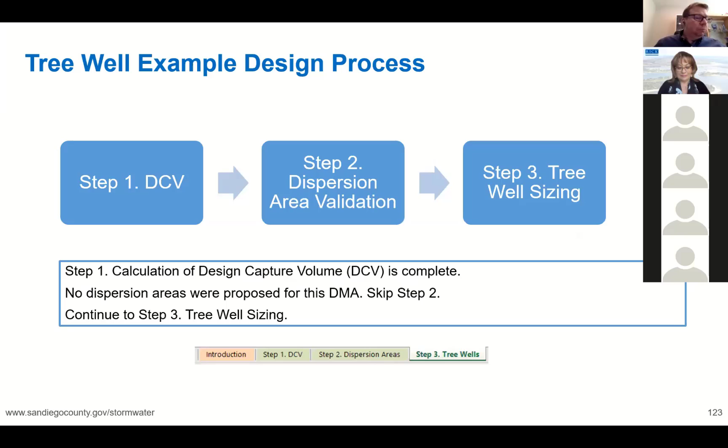That completes step 1, DCV. Since we're not quantifying dispersion, we're going to skip step 2 and go straight on to step 3, tree well sizing. So this is the tree well sizing tab for step 3. The data that we entered in step 1 is showing, but just like with the dispersion areas sheet, at the bottom it says incomplete because we need to size the tree well now.

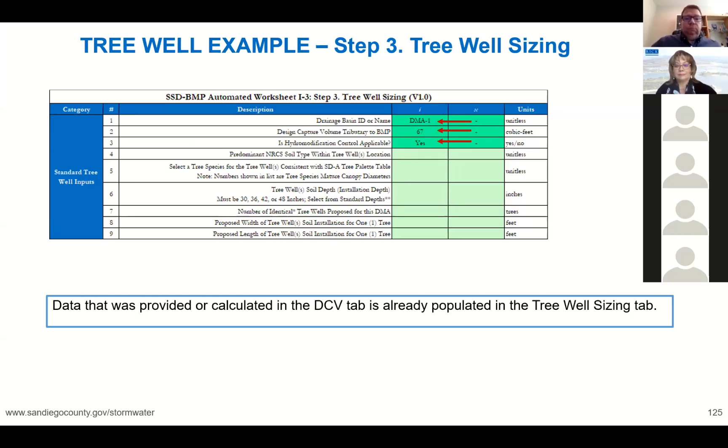So now we'll zoom in on the one column that we're working on. The data that was provided or calculated in step 1 carried over to step 3 in the dark green cells in rows 1 to 3, and now it's our job to fill in the light green cells. As we get started with the design, we can go ahead and start with just rows 4, 5, and 6.

The hydrologic soil group was given at the beginning as group C, so we'll go ahead and select group C. Now let's assume we coordinated with the project landscape architect and decided to try a strawberry tree that has a 20-foot mature canopy diameter.

We're selecting that from a drop-down list built into row 5. When interacting with this spreadsheet, you'll see a couple of places with drop-down lists, to make sure we don't get spelling mistakes or other things that trip up the spreadsheet. For consistency, select it from that list. If you're using a tree that's not from the tree palette table, there are options to select 'other' based on the mature canopy diameter—for example, a 20-foot other or a 10-foot other if needed.

Let's also assume the landscape architect would like this tree well soil to be installed 30 inches thick, so we'll go ahead and select 30 inches in row 6.

At this point, when rows 4 to 6 have been completed, lines 10 to 23 are automatically calculated. The results are still incomplete because we need to put data in lines 7, 8, and 9 confirming what we're actually proposing for the number of trees and the dimensions for the tree well soil. But we can get some help for that from the spreadsheet.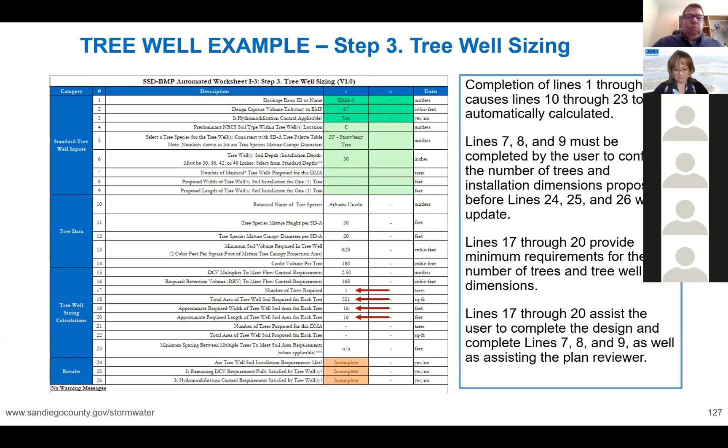So for this example, our results tell us we need just one tree and approximately 16 by 16 square feet. After we enter the data in lines 7, 8, and 9 describing how we'll configure this tree well soil, that's when lines 24, 25, and 26 will be updated.

At this point, if something didn't meet the required criteria—for example, if we reduced the width and increased the length to make a rectangle, but the dimensions put the edges of the soil too far from the tree canopy—that's where you'd see a warning in the box at the bottom. Line 24 might still be orange and say incomplete or no, with a corresponding warning message telling you how to correct the problem.

The design entered in this example meets the criteria, so lines 24 to 26 say yes, and there are no warning messages. In conclusion of the tree well example, be sure to show on the plans the mature tree diameter, as well as the type of tree used, and the area and depth of the tree well soil. The plans should also show how runoff will be directed to the tree.

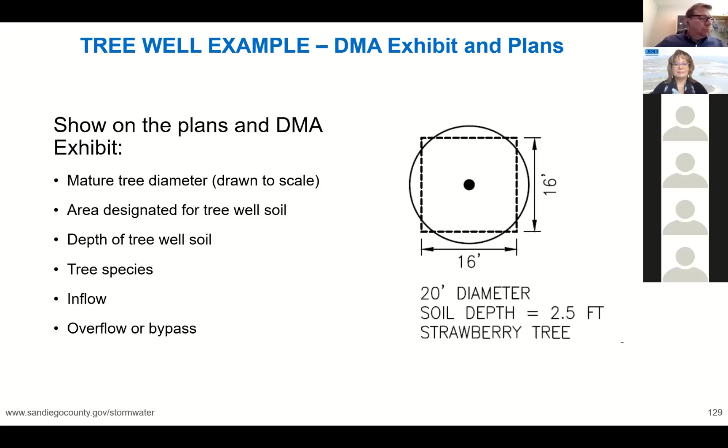So go ahead and download this from the Development Resources webpage and try some numbers in it. The best way to learn it is to try some numbers and just try out some things, see what happens when you enter the different numbers. You can look at the warning messages and you can look at what it takes to complete them. And thank you, and we can take your questions now on the spreadsheet tool and the example problem.

Great. Thank you, Renee and Laura, for walking us through the spreadsheet, the BMP tool, and the example problem. So we do have a few questions, and Robert Reiner has provided 3 questions, so I'd like to combine those, I think probably for Renee. Will a combined tool be created in the future that includes all the new elements when using them both? And then also, is it wise to not require a PE or a landscape architect to sign and stamp a calculation? And is that allowable per the MS4 permit? And lastly, who will be taking responsibility for design errors with the unstamped and unsigned calculations when not installed properly, especially if the engineer of work isn't the one designing the SSD but needs to certify in the verification for the O&M? All right, so 3-part question.

I'll start with the first one, and I'm actually reading them. So okay, great. So will a combined tool be created in the future that includes all of the new elements when using them both? I'm not sure if it would be practicable. I mean, what we're trying to do here is to use different tools depending on the scenario you're in.

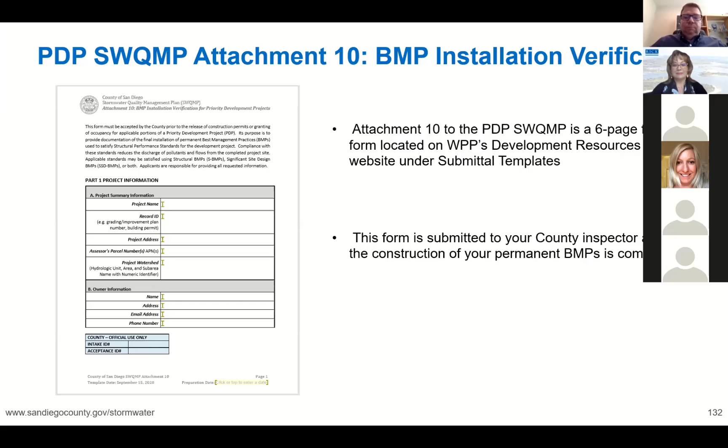So what is the verification process for BMPs? Permanent BMPs for all priority development projects must be accepted into the county's inventory prior to release of construction permits or granting of occupancy. The verification process for permanent BMPs has not changed with the 2020 update to the BMP design manual, but there is an updated attachment template posted online. More guidance for the BMP verification process can be found in Chapter 8 of the BMP design manual.

So at the final stage of a PDP project, the county requires SWQMP Attachment 10, the BMP installation verification form, to be submitted to their inspector, either PDCI or PDS building. The inspector will verify in the field that the permanent BMP has been constructed in accordance with the plan details. If the inspector concurs, he or she will sign the last page of the form and submit it to Watershed Protection as a package, along with the approved SWQMP for the project.

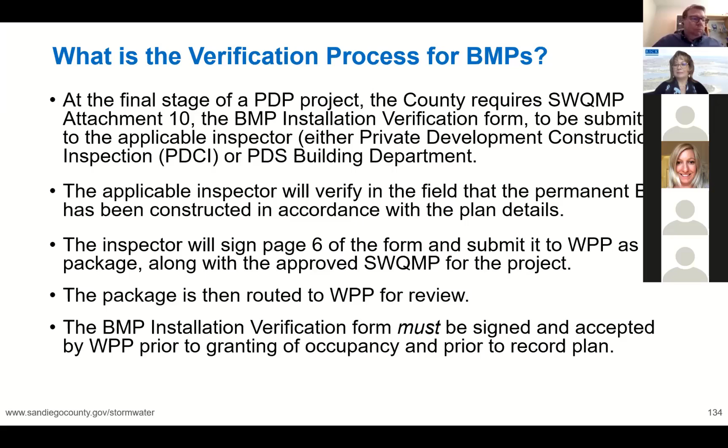And then Watershed Protection reviews the package. And this BMP installation verification form must be signed and accepted by Watershed Protection prior to any granting of occupancy and prior to record plan. There's an example of a completed attachment 10 BMP verification form, and it's found at the end of the PDP SWQMP example that Laura Henry was going over for the SSD BMP tool on the Development Resources webpage under Calculators and Modeling Software, as shown here on this slide.

So I'm going to go over an example of an acceptable BMP installation verification package. In this example, we're going to use Laura Henry's PDP SWQMP example that we posted on the website, as we just showed you. There's 4 parts to this form. Part 1 is the project information, which is pretty straightforward. You should make sure that the owner information is current and up to date. And this will be the responsible party information that the Watershed Protection Program will use for future maintenance verification mailouts.

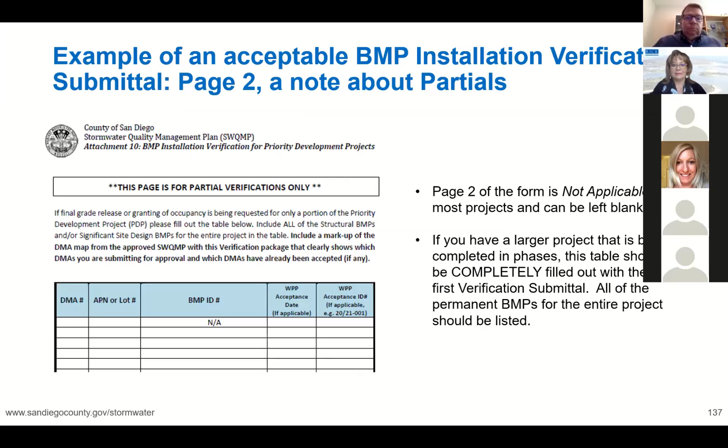I did mention partial verifications. On page 2, there's a place to document partial verifications. This page can be left blank for most projects or deleted. However, if you have a larger project that's being completed in phases, this table should be completely filled out with the very first verification submittal. All the structural and significant site design BMPs should be listed for the entire project on this table.

Part 2 of the form is the BMP inventory information. That's a very important part of the form. This table should list all of the BMPs that you're submitting for verification and be completely filled out with the BMP ID, the BMP name, the number of BMPs, the DMA. In this example, they're just SSD BMPs, which do not have maintenance category or recorded document number. For the SSD section, there are pull downs for tree wells or dispersion areas, and you should be able to add rows pretty easily on our new updated template.

Part 3 is the required attachments. It's a checklist. Photographs are always required. At a minimum, we require final construction photos of the BMPs. We also like to see additional photos of the BMPs that were taken during the construction process. And we can go over that in the next slide. Recorded maintenance agreements are required for private Category 1 and Category 2 BMPs. Significant site design BMPs, such as tree wells, do not have a category and do not require a maintenance agreement to be recorded.

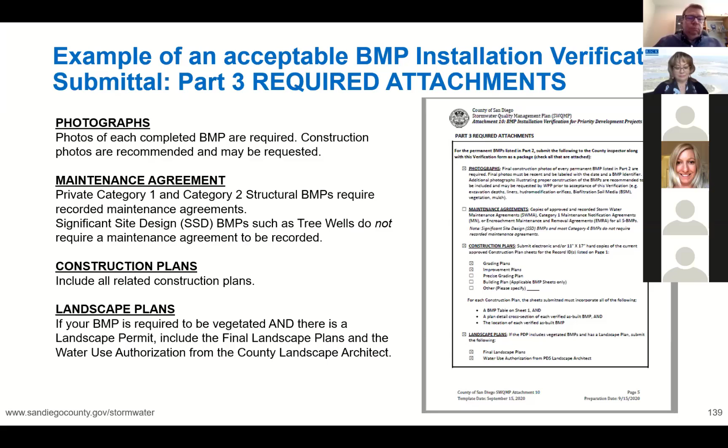Construction plans are always required to be included with the submittal. Landscape plans are only required if the BMPs are vegetated and included on a permitted landscape plan. If that's the case, we ask for the final landscape plans and the water use authorization letter from the county landscape architect. Here is an example of photos submitted for tree wells.

And in general, I would say the more photos, the better, so plan ahead and you can't go wrong in documenting that you constructed your BMP properly.

Part 4 is the preparer certification. Structural BMPs such as biofiltration basins must be certified by a licensed engineer. Significant site design BMPs such as tree wells, on the other hand, do not require an engineer's signature. However, if your project contains a mixture of both types of BMPs, structural and SSD, then you would need an engineer's signature on Part 4.

WPP acceptance, what happens next? Once watershed protection has accepted the BMPs, the county inspector can continue the process of closing out the project. Watershed protection will inventory the BMPs in an asset management system in order to track their maintenance in perpetuity as required by the MS4 permit. Each year, the County of San Diego is required to verify that structural BMPs located on properties in its jurisdiction are maintained and operating effectively.

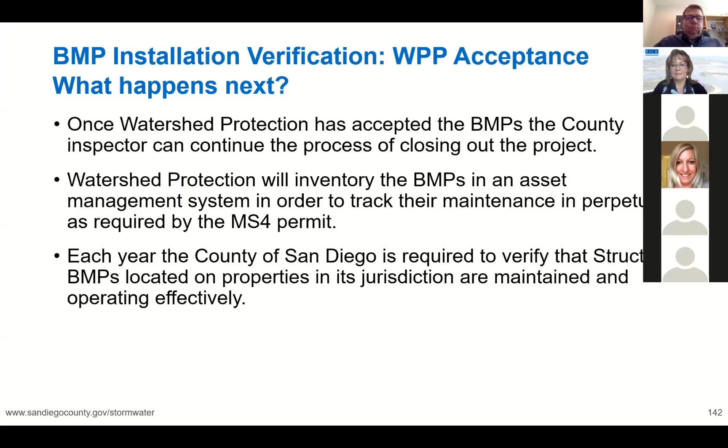Okay, I just wanted to mention that we have a new app for smartphones to help owners of structural BMPs submit their annual maintenance verifications. The annual maintenance verifications are due prior to the rainy season on October 1st. The self-verification program doesn't currently apply to owners of significant site design BMPs. And more information can be found on our website.

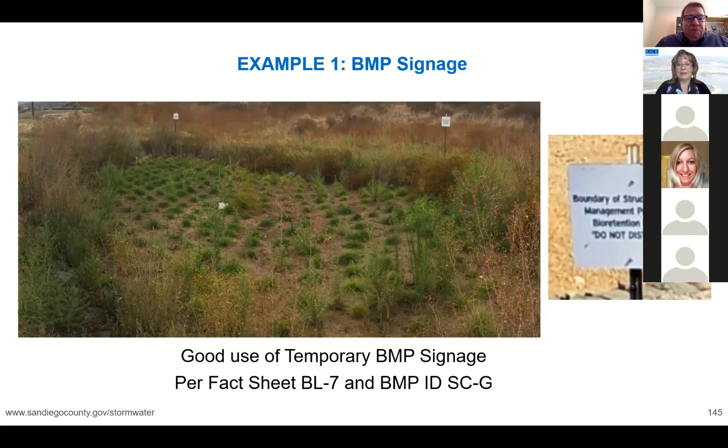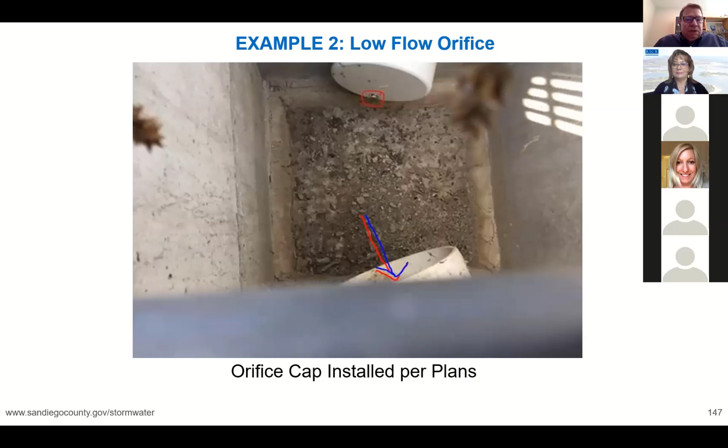However, if this happened to be a pipe, it gets really challenging. When it's not a box where you can actually go down and do the maintenance, but a pipe, that becomes really challenging, not just for inspecting that the orifice is there, but also for maintenance in the future.

Another good example is the fact sheets we released for property owners; they're also under the development resources page of the county under maintenance. These are for property owners, the people who are going to own the BMPs in the future and maintain them. So we make sure we have plain language for them to understand, not technical language, because they don't need that. So if you can include those in the maintenance section of the attachments of the priority development SWQMP, that would be great.

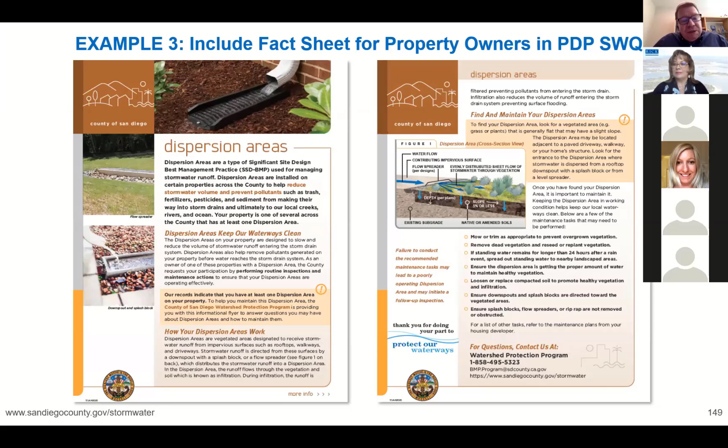And lastly, similar to the photos Julie was showing you before, when you have a completed structural BMP or SSD BMP and you take the photos, make sure the photos clearly show the entire area, show some degree of establishment in the BMP, and that everything looks clean and ready to go.

These photos would more than likely be acceptable on the first pass, rather than going back and forth trying to get additional documentation when you're trying to close a project and waiting on occupancy. So the better information you submit, the easier and faster it will be to get that verification package approved, and occupancy can be granted on a project. And that's pretty much it.